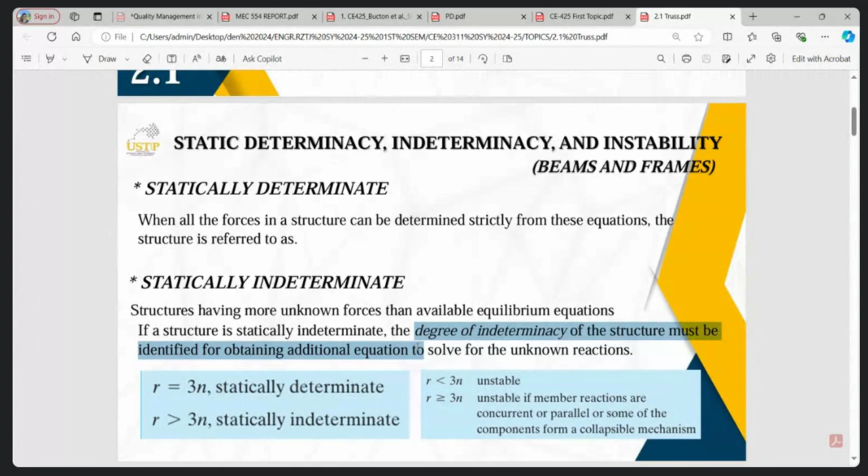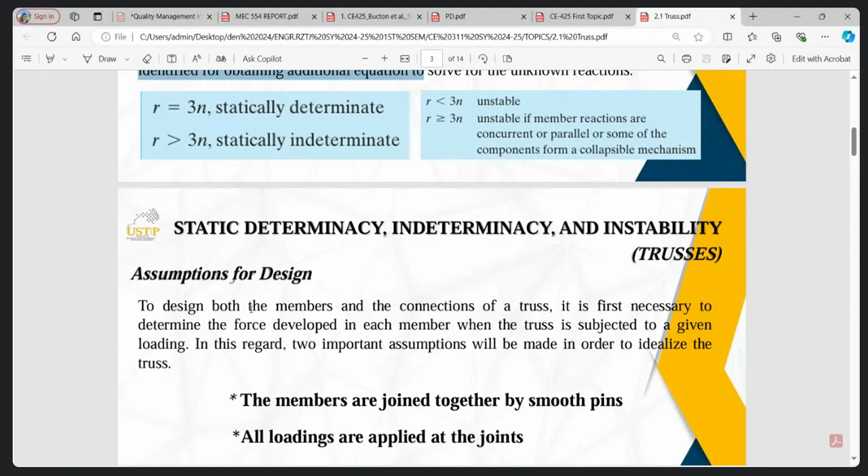Let's go to frames, I mean trusses. Let's go to trusses. So the assumption of our design sa truss is that the forces are developed within each member. So to design both the members and connection of a truss, it is necessary to determine the forces developed in each member, now when the truss is subjected to a given loading.

So in regards to this, there are two important assumptions we made in order to idealize our analysis sa truss. The first, the members are joined together by a pin, so pin connected atong trusses. Guys ha, so isa ka member, isa ka member. This is a pin, so when we say pin, it has two reactions, duha.

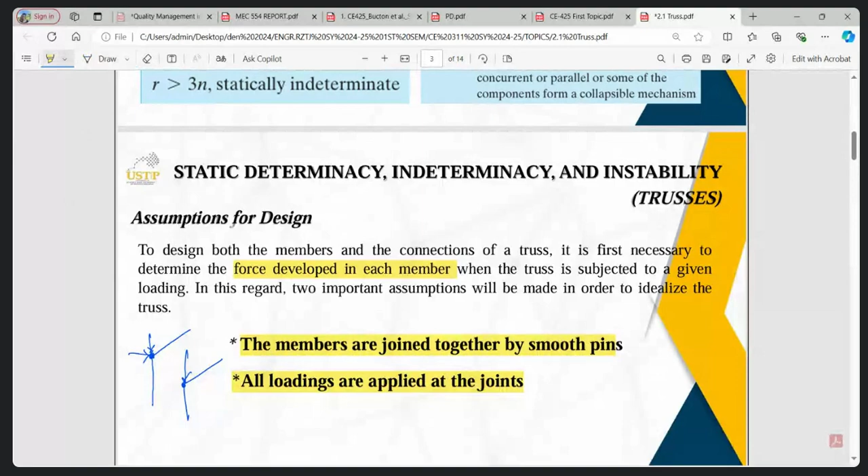So because of these two assumptions, each truss member acts as an axial force. If it elongates, it has a tensile force; if it shortens, it has a compressive force. So ang behavior sa atong trusses, tension, compression na gina siya - birahon siya or idusok siya. So kung amo gawa sa atong analysis positive, that is tension; amo gawa negative, that is compression.

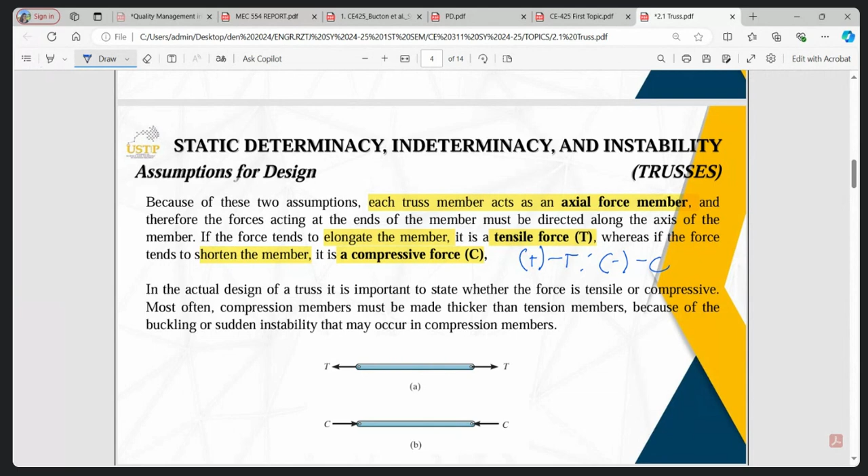On solving for the forces in each member - now nganong importante man, on analysis of trusses, it is important na ma-identify if it is tension or compression. Tungod kay diha man nato ma-identify kung what type of materials ang gamiton. So nga niya behavior for tension - nabirahon siya sa tension, idusok siya sa compression.

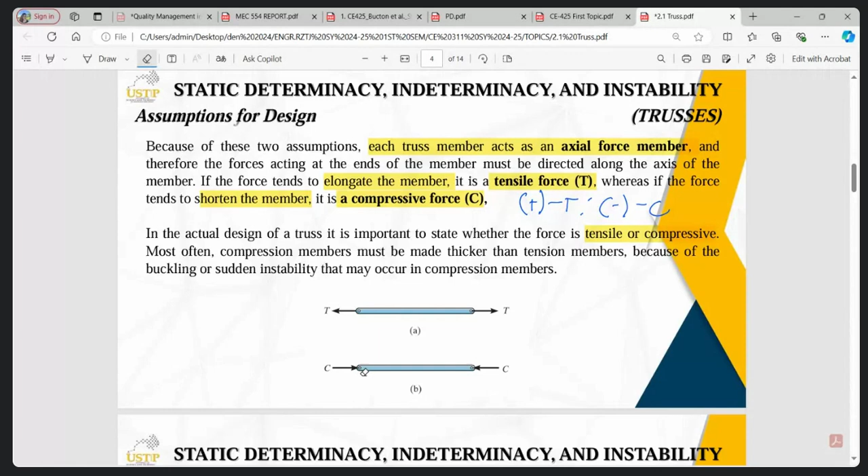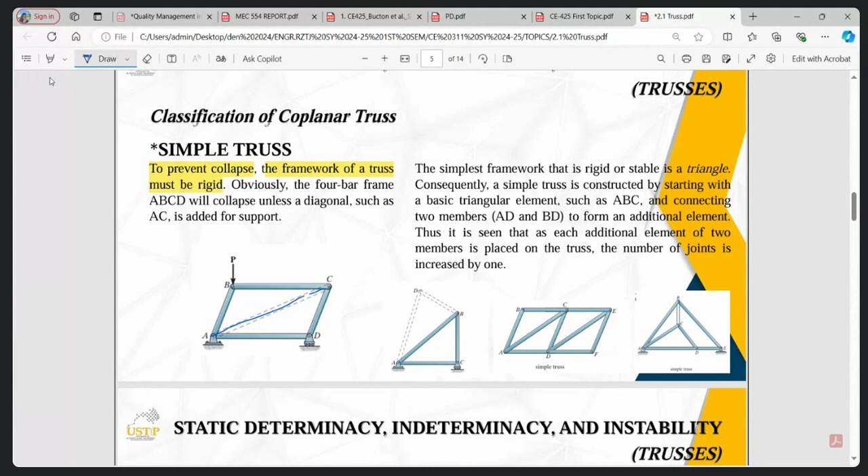So for its determinacy, classification pa diay. We have three classifications of coplanar trusses - two-dimensional trusses ni siya. The first is simple truss. So to prevent collapse, the framework of our trusses must be rigid. Okay, rigid - kung tanaw nato ani nga example, A, B, C, D, kung subjected siya og load P, it will collapse, kay wala may bracing sa tunga, walay diagonal sa tunga. Unless ato ning butangan diri, unless atong butangan. So the simplest framework of a rigid or stable truss is in a form of a triangle.

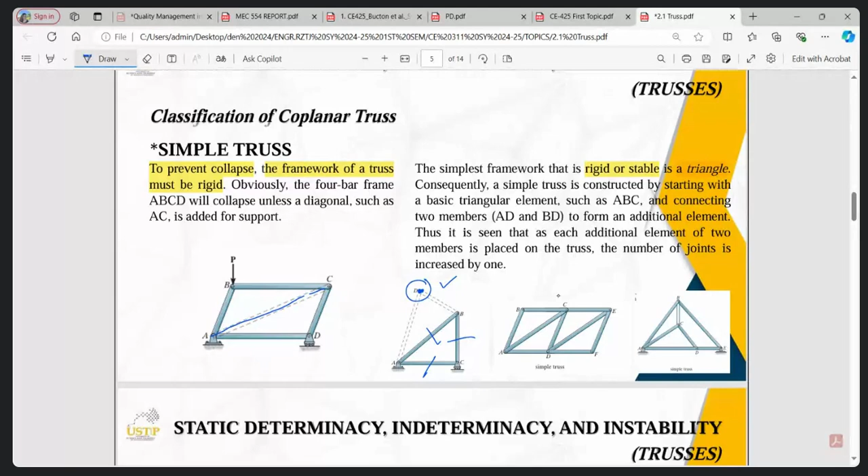Munang basic simple truss, so example na to ani is kaning truss ABCD - I mean truss ABC. So this is a simple truss. We also consider kung mudugang tag two members, the AD and the BD - kung mudugang tag additional member, madugangan niya additional na siya new element and then naa poy new joint. So this is the joint and we consider this as the members. Example of simple trusses is this one and this one.

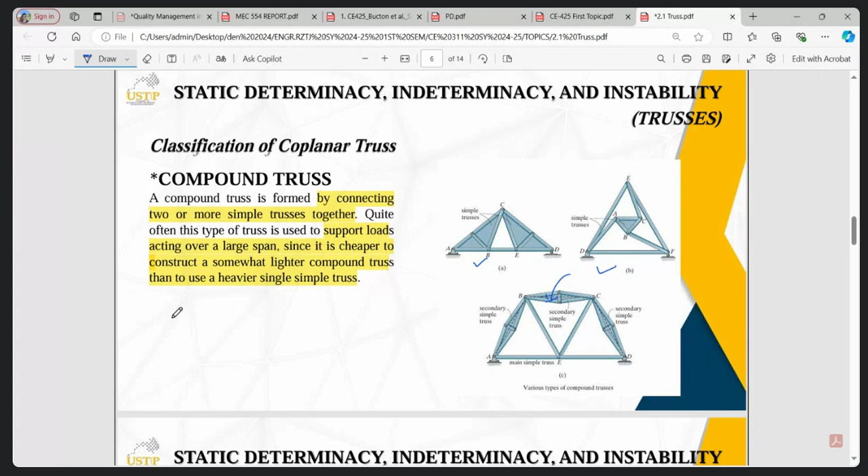Ana, simple compound truss. The third one is the complex. Complex truss is one that cannot be classified either simple or compound - like gid si complex. So it uses a general layout of members different from that used in simple and compound. It often incorporates overlapping members, o di ba kani?

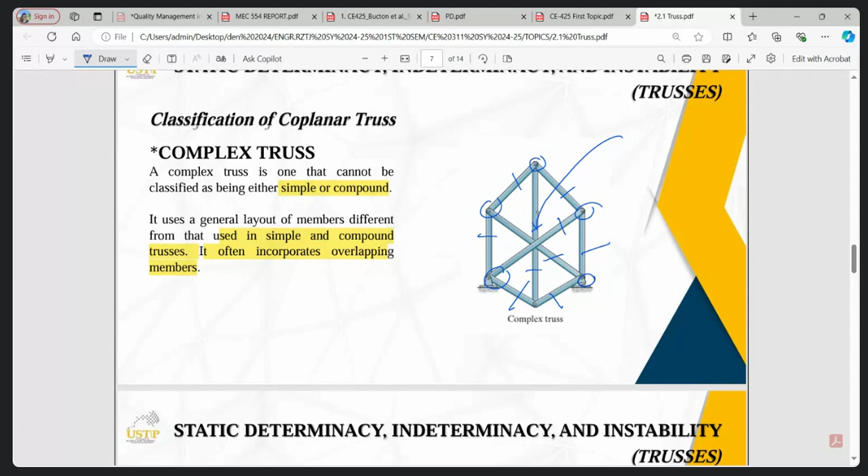On our compound and simple trusses, they are connected through the joint. However, diri sa center, as you notice, walay joint diri. Muna inyong bantayan ha - as we go on for identifying the determinacy, bantayan ninyo kung unsa nga point ang joint connected. Kung overlapping siya, you cannot count here as joint ha, dili ni joint diri - nag-overlap lang ang member diri, walay joint diha. So kung ihap kag member ani, 1, 2, 3, 4, 5, 6 - this is considered only 1, 7, 8, 9. So 9 ra kabuk member ana. So that's it for complex truss.

Now let's go to the determinacy. So on identifying, same ra gyapon - we will identify it as statically determinate and statically indeterminate. So the definition is the same: statically determinate, wherein the number of reactions satisfies the number of our equations, and statically indeterminate is there are more unknown forces - nanubra ang atong forces kaysa sa atong reaction.

And if it is statically indeterminate, we will identify the degree of indeterminacy. Ang nag-change lang is the equation - this equation will be used for trusses only. B plus R equals 2J for statically determinate. B plus R greater than 2J, statically indeterminate. If B plus R is less than 2J, that is unstable. And then special condition, B plus R greater than or equal to 2J is also unstable - depende, no? Depende sa support reaction and if it is concurrent or parallel.

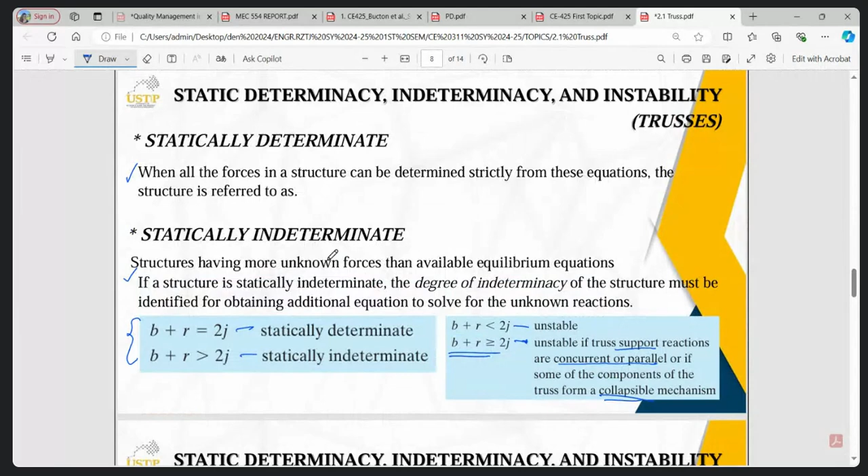And also, if the support that you put is subjected to collapse, it cannot resist the applied loadings. No, the reaction is insufficient. Special cases. So on trusses, we will identify first if it is...

...external stability. Internal stability can be identified using the equation. External stability can be identified by assessing the reaction. So a structure or truss is externally unstable if all of its reactions are concurrent or parallel.

Where is it concurrent, ma'am? So this is an example of concurrent. Its support is hinge and roller, but the roller is on the vertical side. So here its reaction is on the x-axis.

Concurrent is if all the reactions intersect at a single point - their lines of action intersect at a single point. Like this, that point there, that point there, that point there too. That is concurrent. If all the reactions are concurrent, then this is unstable. So we cannot solve trusses that are unstable.

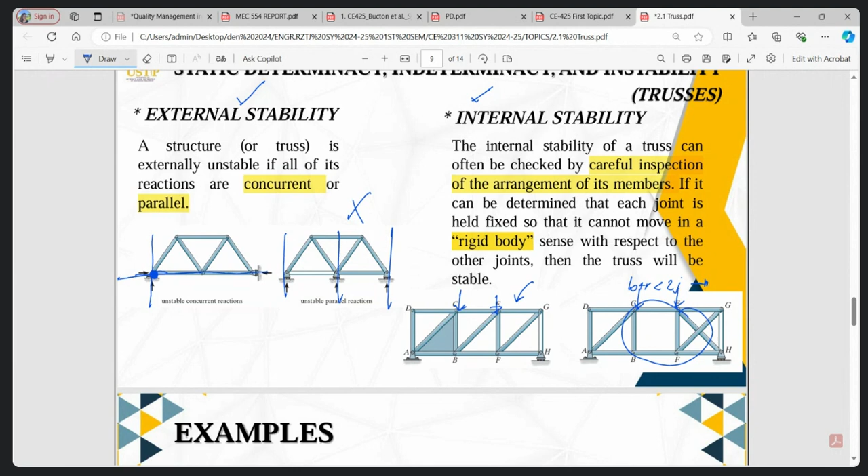So the illustration of that is, for example, if you look at this, all joints are connected, based on all of them. So if you apply a load there at the joints, it will not move. Unlike this other one, if you apply a load here, this part will move. So we consider this as internally unstable.

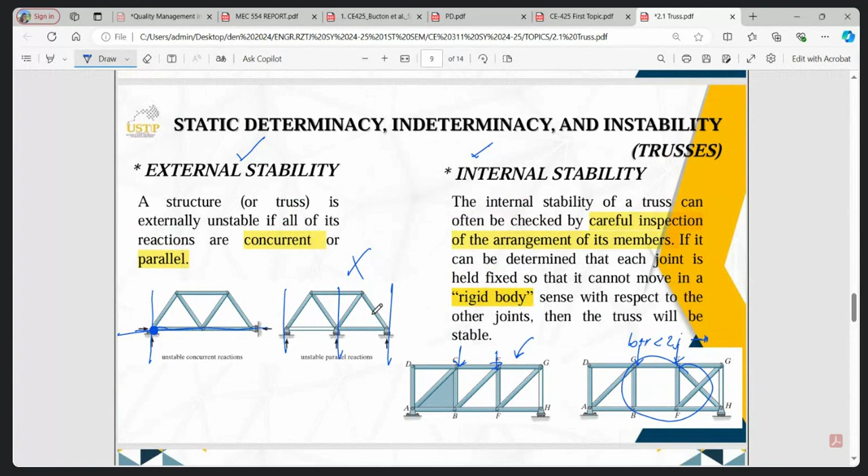So identifying the determinacy in our process. So let's go now to examples.

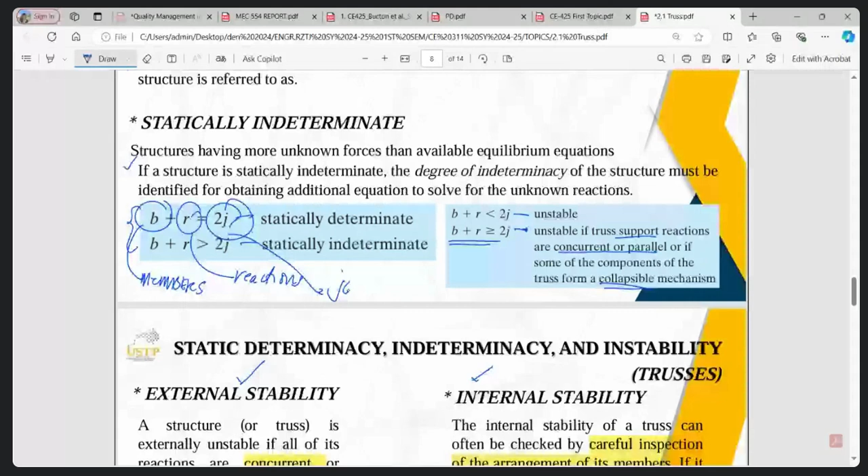So the equation is B plus R equals 2J. B is the number of members, R is the number of reactions, J is the number of joints. That is simple mathematics since you just count. Just be careful in counting.

So first, identify if it is externally stable or unstable. The roller has one reaction, the hinge has two. So this is okay, since they don't intersect at a single point, and they're also not all parallel. So this is externally stable.

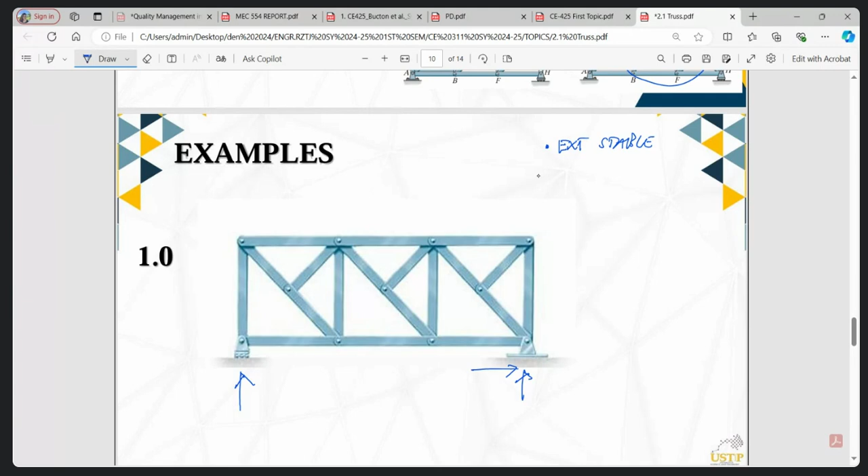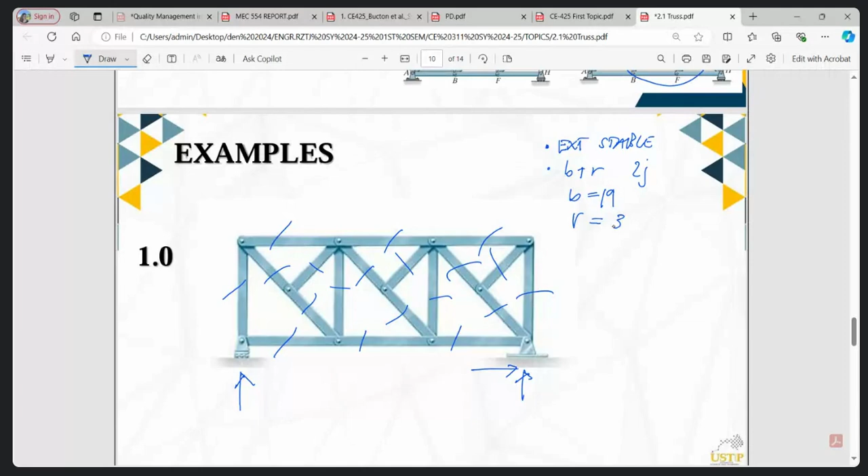So once it's stable, we proceed to checking for the determinacy. So B plus R equals 2J. Number of members: 1 through 19. Number of reactions: three. Number of joints: 1 through 11. So 19 plus 3, equals 2 times 11, that's 22 and 22.

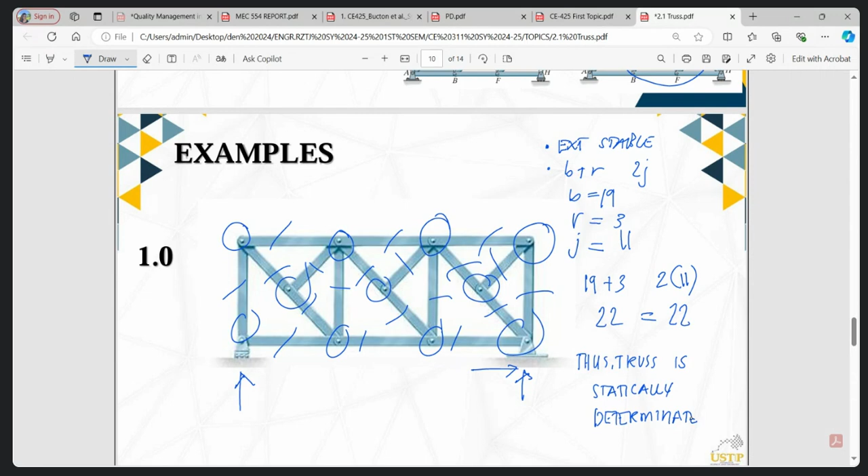So our truss is thus statically determinate. That's all, class - you just have to count.

So second example, first check the external stability. So this is a hinge, two reactions. This is a rocker, one reaction. So that is externally stable.

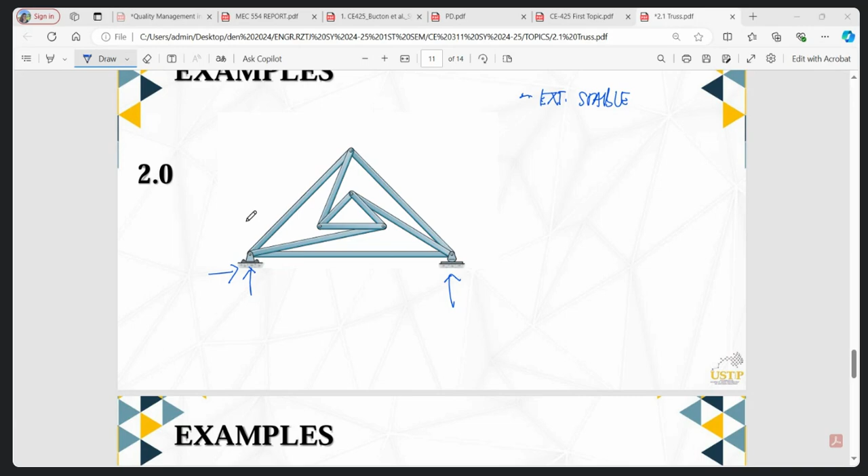Okay, so it's externally stable. If externally unstable, you cannot proceed because it satisfies this condition - it's unstable because either the support is concurrent or parallel.

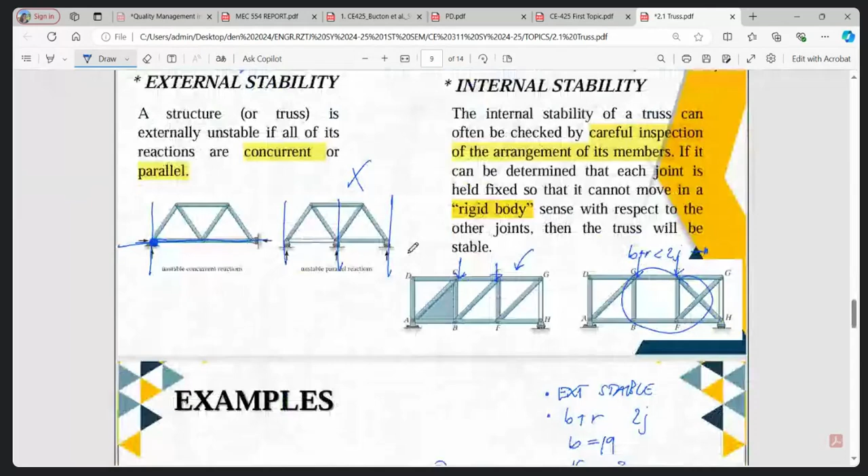So B plus R equals 2J. Our B is 1 through 9. Our reaction is 3. Our joint is 1 through 6, so J is 6. So 9 plus 3 equals 2 times 6, that's 12 and 12. So the truss is thus statically determinate.

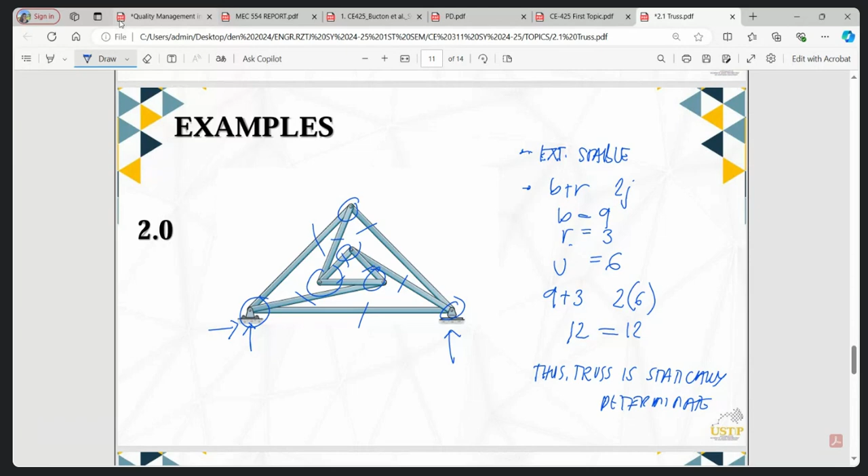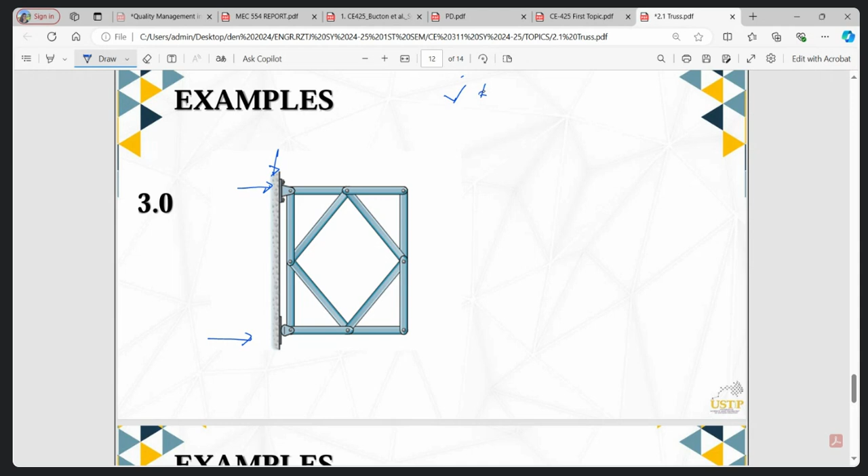Okay, this one is easy now. This is a hinge, two reactions again. Rocker, one. So externally stable.

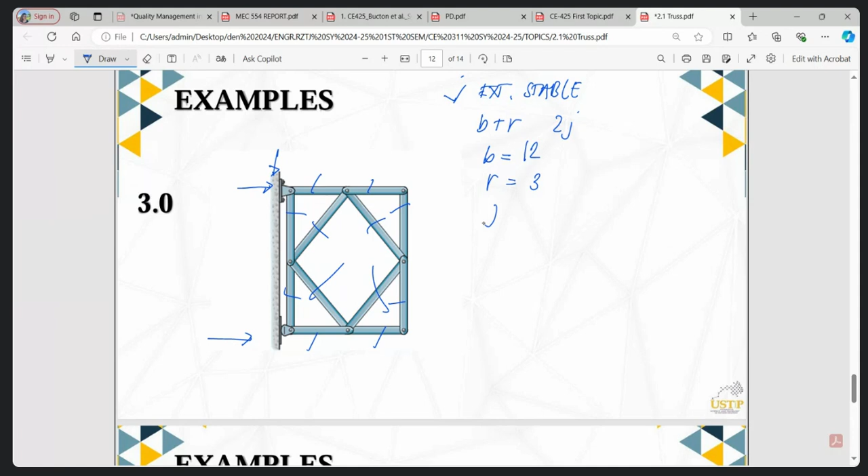So let's proceed. B plus R equals 2J. B is 1 through 12, so B is 12. R is 3. J is 1 through 8. So 12 plus 3 equals 2 times 8, that's 15 and 16. So our truss is internally unstable.

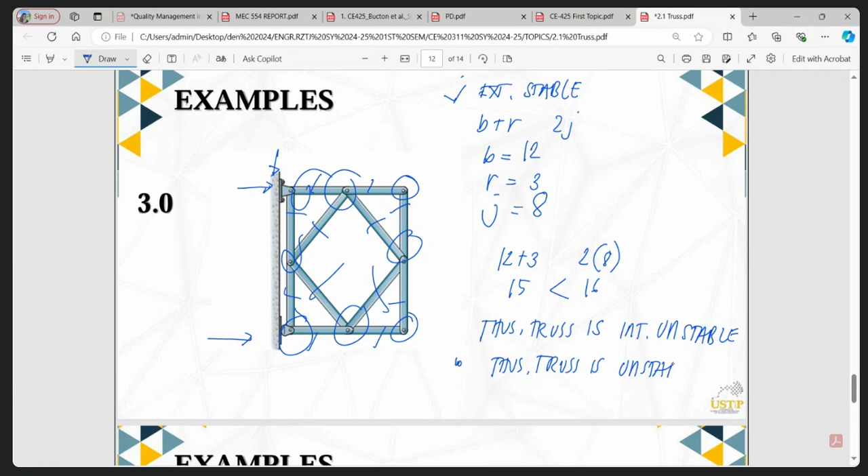So internally unstable is also considered unstable overall. So thus the truss is unstable. What does that mean, class? You cannot solve that since it's unstable, unless you make changes to your truss design. Then you check again for the determinacy and proceed with analysis.

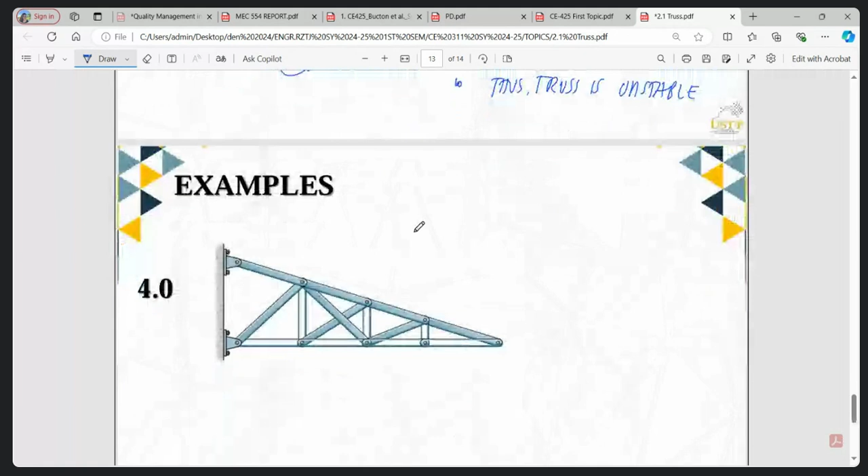So here, this is a hinge. This is also a hinge. So that's fine - externally stable.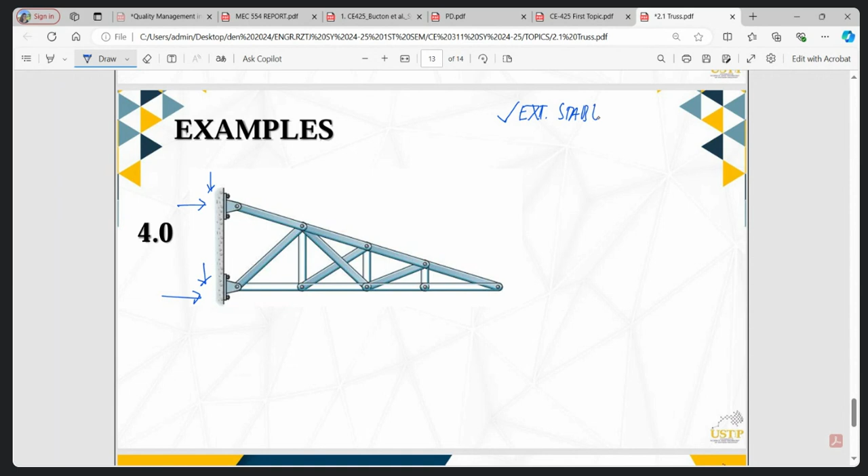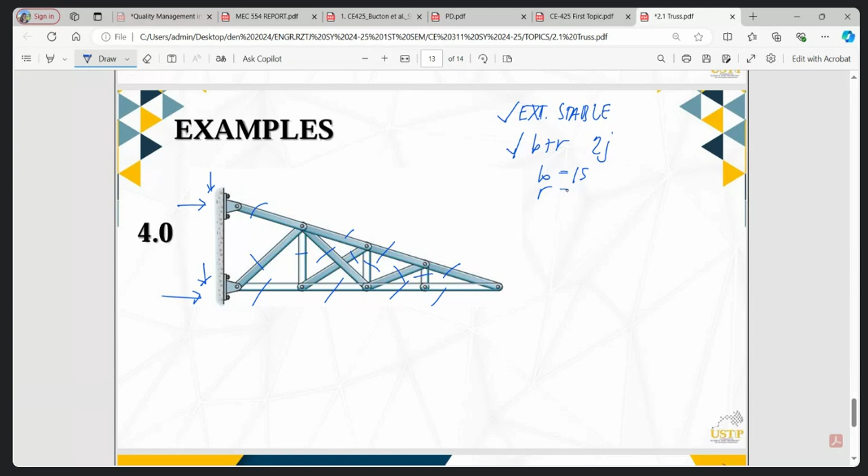So let's also proceed with B plus R equals 2J. So B is 1 through 6, let's look at this - this is not connected by a joint, there's no joint there, the member just overlaps. So where it forms an X, that's still one member each. So B is 1 through 15. B is 15, R is 4, J is 1 through 9.

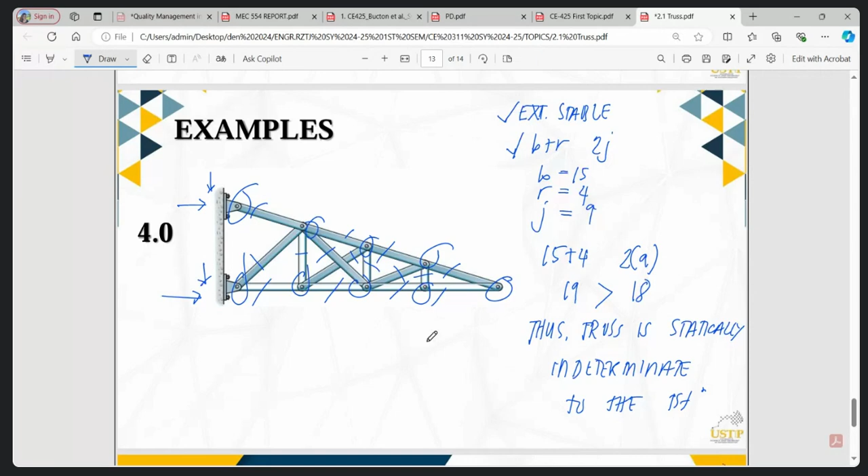Alright, that's it. So that's it for the determinacy and stability of trusses. Any questions? Is it understood, class? That's the last topic, and the simplest one.

Okay, next we will proceed to analysis. So any questions? Understood, right? Just memorize the equation.